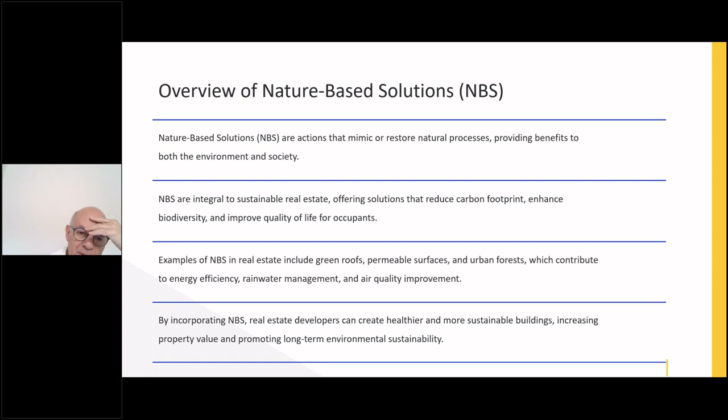Very typical examples of nature-based solutions are green roofs, permeable surfaces, urban forests, and trying to maintain and create conditions for more energy efficiency, rainwater management, and air quality. So when we incorporate nature-based solutions, real estate developers create a healthier and more sustainable building, not just increasing property value, but promoting long-term environmental sustainability.

So let's see how these two things relate together: the EU taxonomy on one side, the nature-based solutions on the other.

Basically, the criteria for EU taxonomy specifically requires some nature-based solutions to qualify as sustainable. Alignment ensures nature-based solutions meet standardized green criteria, and guidelines help developers implement those nature-based solutions effectively.

On the other side, nature-based solutions in real estate refer to green infrastructure and practices that mimic natural processes. The idea is to promote biodiversity, climate resilience, and community well-being. So nature-based solutions integrate project sustainability and long-term value.

And that's the benefits we can see in nature-based solutions in real estate. Basically there are environmental benefits, social benefits, and economic benefits. The environmental benefits include biodiversity, reduced urban heat island effect, and improved air quality.

On social, it encompasses community engagement, health and well-being promotion, and of course aesthetic enhancement of real estate projects. Economic benefits feature cost savings in maintenance, increased property value, and long-term sustainability.

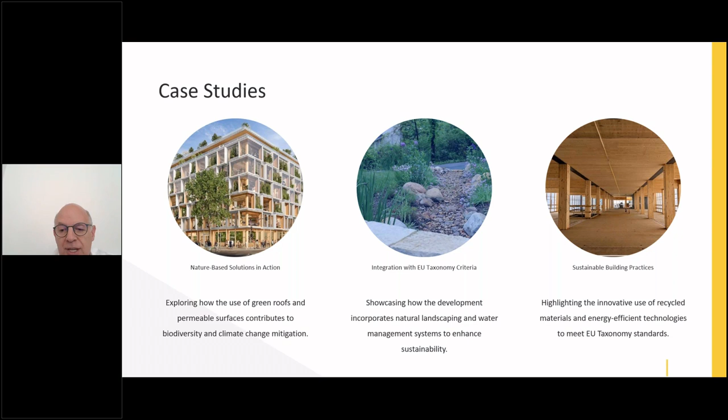So one of the things we are going to explore is green roofs. We're already doing that in Porto. Several projects already have implemented green roofs, and then we try to incorporate natural landscaping and water management. And the big focus in our company at the moment is the innovative use of recycled materials and new construction materials.

Let's talk about something not very used yet in the property development industry, which is bio-based materials. We are going to speak about these bio-based materials that slowly but surely we are going to increase the use of, to reduce the carbon footprint in our buildings. The main challenge I mentioned before is to have the certification level that we can implement this at a wider scale. But I'm sure everybody understands that lots of effort is being done right now to make sure these new materials have the certification required to generalize and intensify their use.

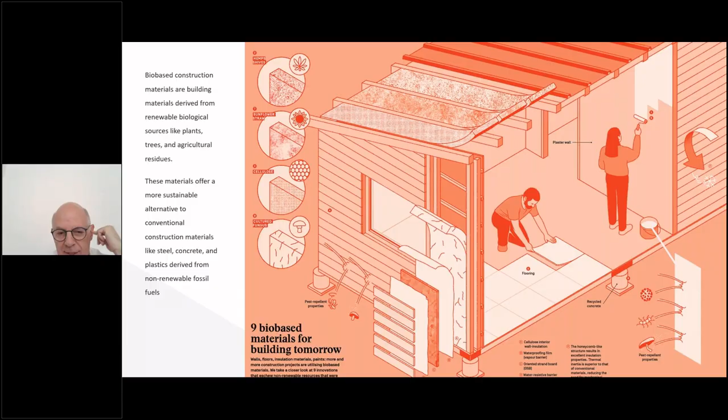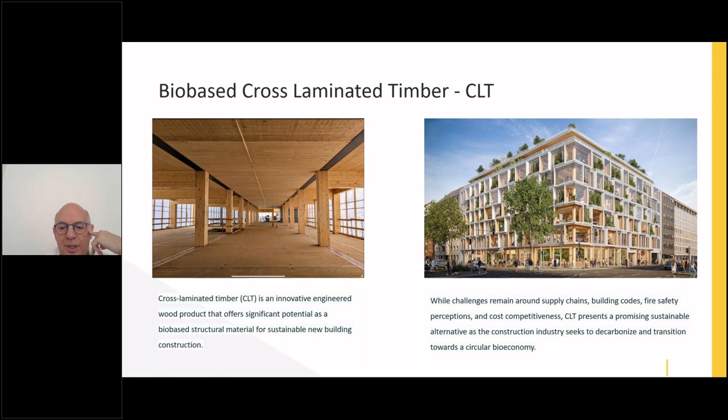The first and most important and most known is cross-laminated timber. CLT is an engineering wood product widely used for structural components of buildings, and this is a very big change in real estate development recently. We are seeing new CLT factories pop up all over Europe. Lots of countries now have their first factories to create this structural and construction material locally, to avoid large carbon footprints from transportation. This is one of the most promising materials.

One of the most innovative materials is coming from old age but with new techniques to use, which is straw. Straw panels and straw insulation panels for facades are seeing lots of new uses and applications, and they have very good behavior on the carbon footprint they capture. So it's a very promising biomaterial.

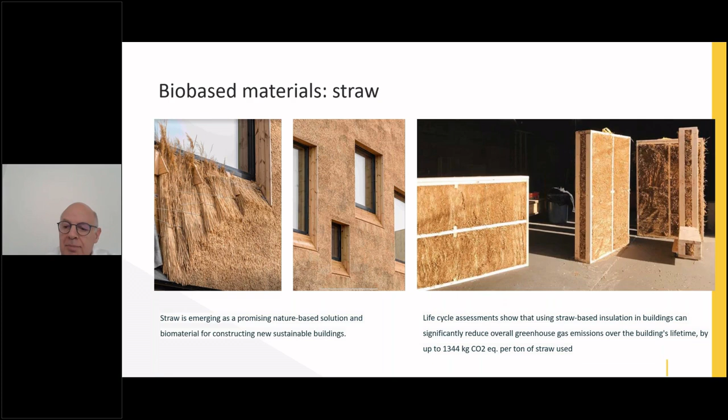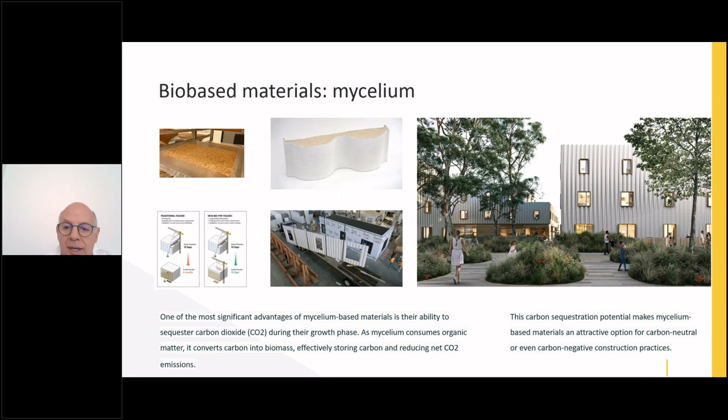The other one, which is very interesting, is mycelium. Mycelium is an amazing natural material that, with the proper technology, can create similar products to what we've seen until today with petrol-based plastic polymers. We can replace these petrol-based polymers with mycelium, with lots of advantages, becoming a natural material as opposed to the other.

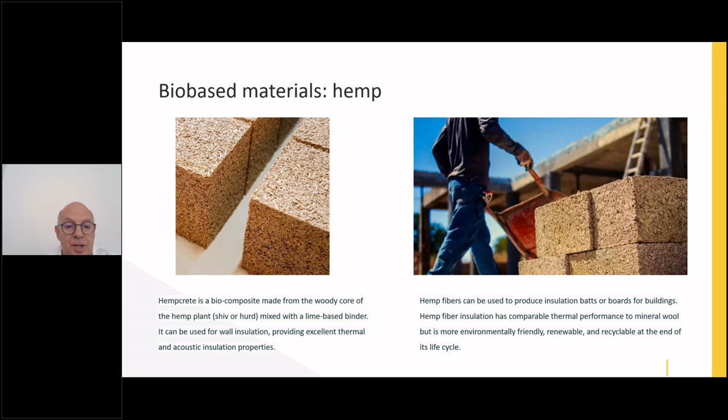Hemp is already being incorporated in a lot of construction insulation materials, and in Portugal we already have at least 2 factories organizing and providing it for construction. So it's something that is already being incorporated. Again, the issue is certification, which is very limited at the moment, but we hope to increase this very fast so it can become more used.

The other important part of these nature-based solutions is to try to complement and implement natural sources of energy. Photovoltaic panel use is already very widespread, especially in Spain and Portugal, where we have a very successful sustainable energy strategy at the national level. Solar photovoltaic has a natural limitation, which is the solar hours, so we are intensively studying the possibility to complement it with new generation urban wind turbines.

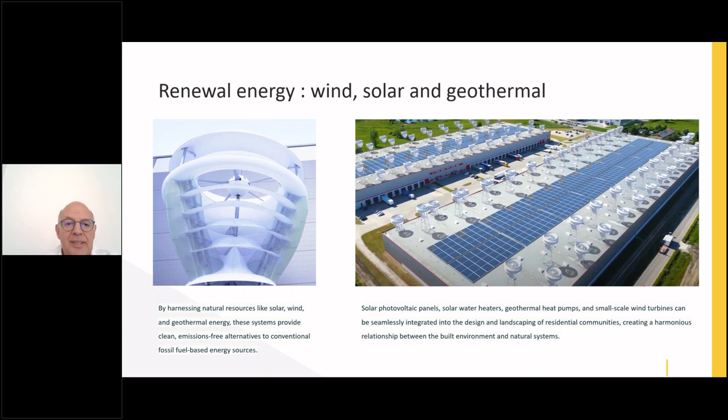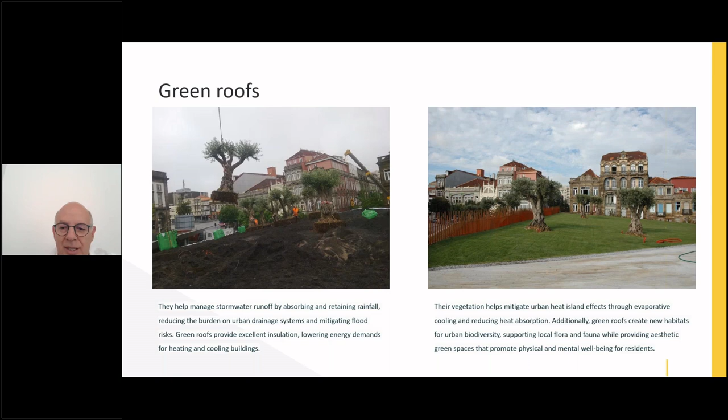Another important thing, shown in an example of a project we've done in Porto, is the use of green roofs—in this case with olive trees on the roof garden. It's a very successful square in downtown Porto, and I'm pleased to say the 50 olive trees put there 12 years ago are in very good shape, continuing to provide a qualified nature space in the middle of the city.

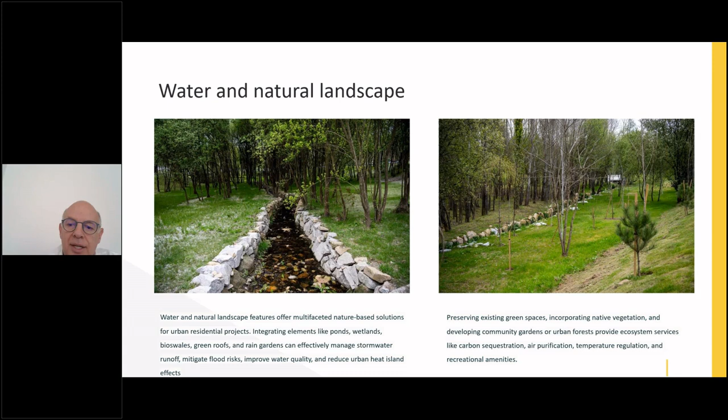Another important strategy is water and natural landscape, especially considering the extreme climate events we're going to face in Portugal more and more. We need a water strategy for the cities and for each development plot, improving the soil's capacity so infiltration of water to the subsoil can happen regularly. So when there's lots of rain, the water can go to the subsoil as much as possible. Water and natural landscape are very important parts of the green, nature-based solutions strategy we are implementing in our projects.

So just to wrap up, I want to identify the main challenges and barriers we're facing: limited awareness and understanding of nature-based solutions among real estate developers and investors, and maybe higher initial cost for implementing them. We have to do proper impact analysis on the financial side so everyone understands that even if it's apparently more costly up front, when we reach the carbon tax environment, we'll be in a much better, more financially sustainable position.

It is sooner or later we are going to have that. So the point is, the challenge is always a new thing in measuring how effective nature-based solutions are when they meet this European Union taxonomy criteria. We still have some standards and certification issues that are not fully implemented.

Levels is very recent, it's not generalized yet. Levels is the European Union approach to the EU taxonomy that allows us to identify the steps we need to take to make sure our developments conform with this criteria. But everything is very new, and not lots of people know how to deal with that. So it's the education challenge.

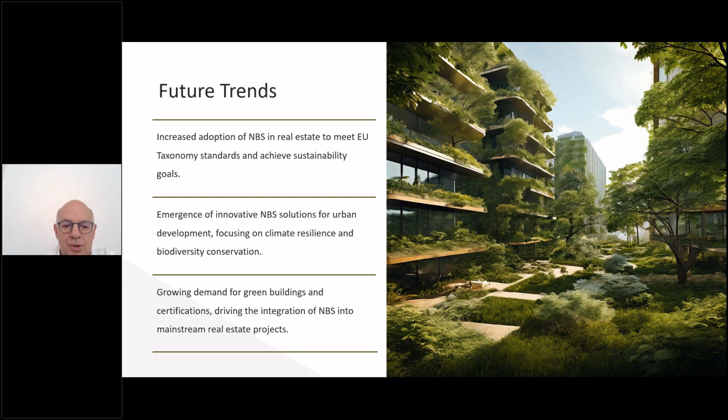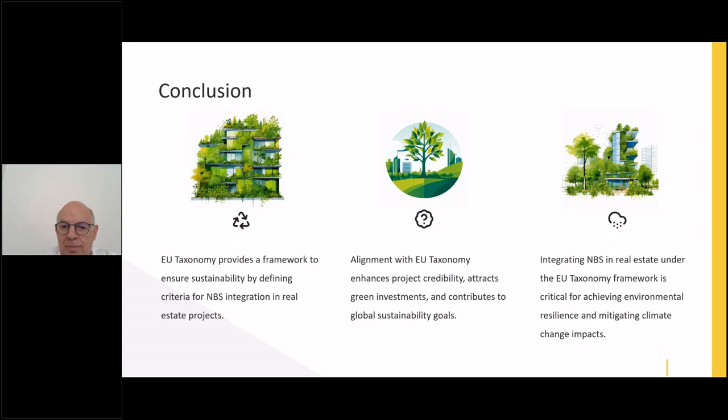So in conclusion, EU taxonomy provides a framework to ensure sustainability by defining criteria for nature-based solutions integration in real estate projects. Alignment with EU taxonomy enhances project credibility, attracts green investments, and contributes to global sustainability goals. Integrating nature-based solutions in real estate under the EU taxonomy framework is critical for achieving environmental resilience and mitigating climate change impacts. Thank you very much for your attention, I hope it was an interesting subject for you.

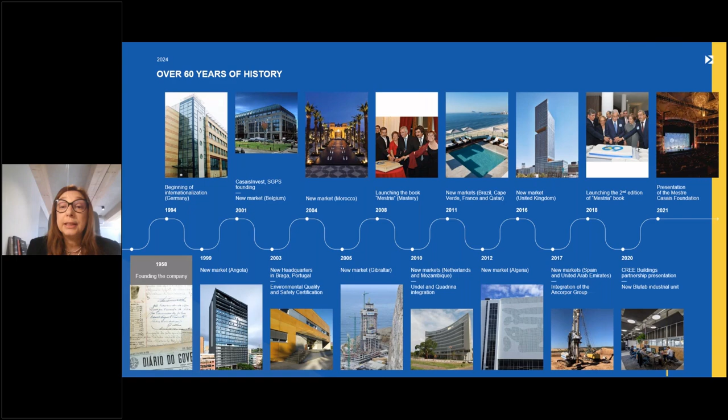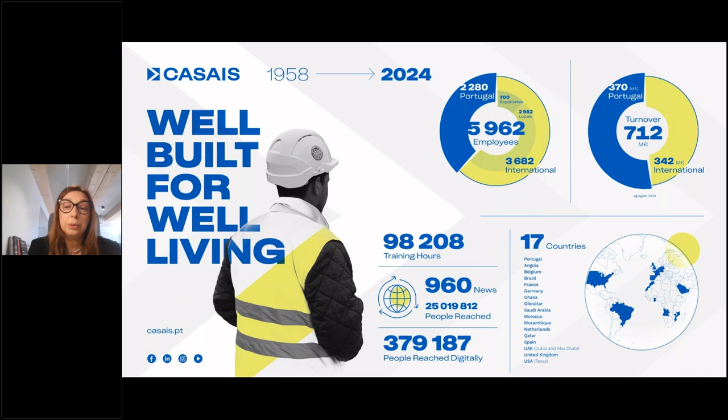For us, real estate is now, but we have been working in construction for over 60 years. We started in Portugal, and we are now present in 17 markets. We have one thing that makes us very proud: 98,000 training hours. We believe that people are the future of the transition in construction. We are almost 6,000 employees worldwide, and we have a turnover of 712 million euros, the majority made in Portugal, but a big percentage made abroad.

We have 3 business areas: engineering and construction, trades and industry, and real estate and asset management, which allows us to have a very holistic vision of construction as we are present in all of them. So the transformation in construction in this small video that you are seeing right now is our holistic vision of it.

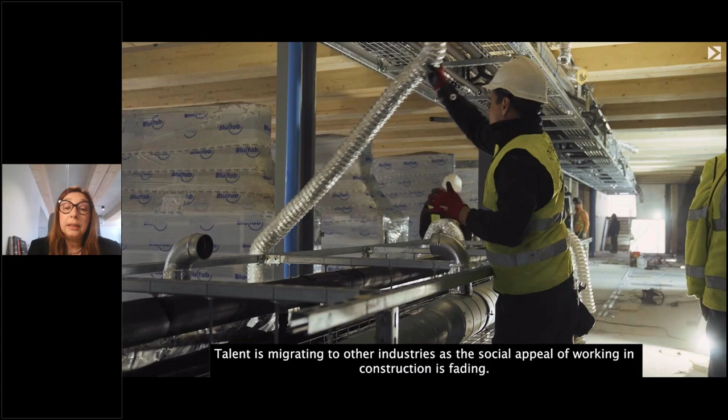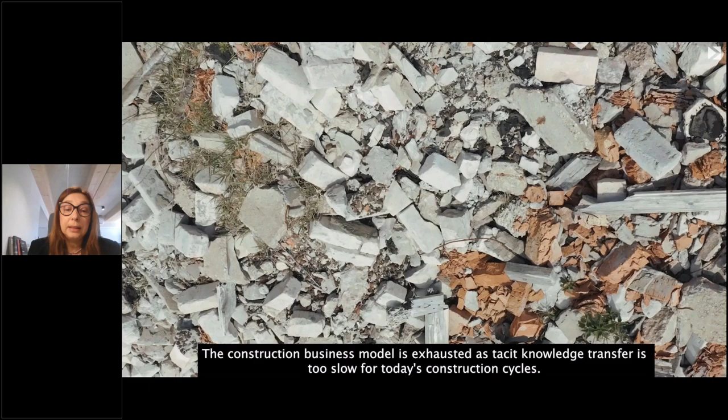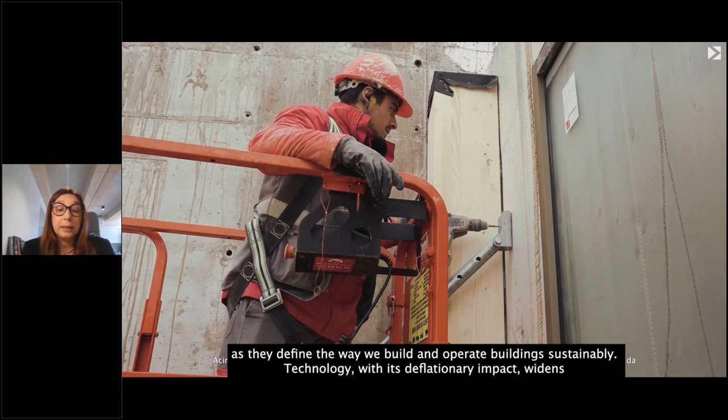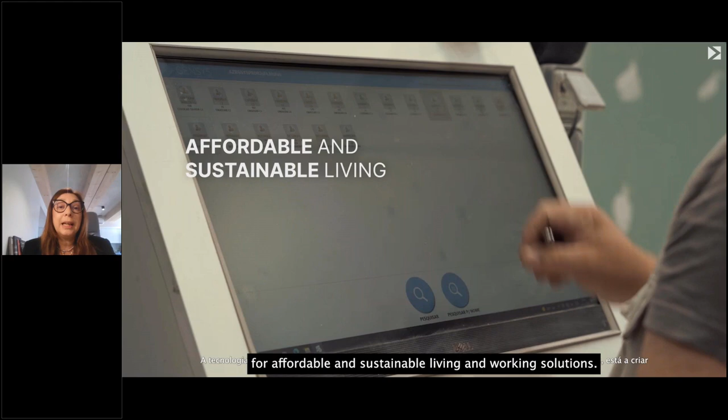We know that economy and society are changing, and migration in the industry - the construction industry appeal is not a big one. So we have to do something to attract talent and to make construction have less impact on climate change and the environment. So we need new ways of building, new technologies, and new ways of thinking, to decrease the gap between the need and the capacity of the sector to meet it.

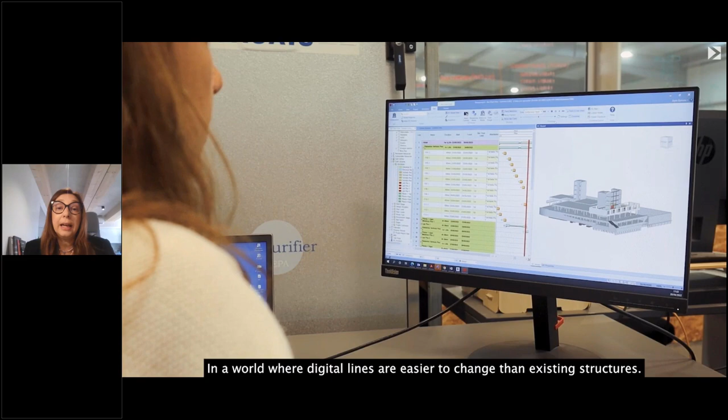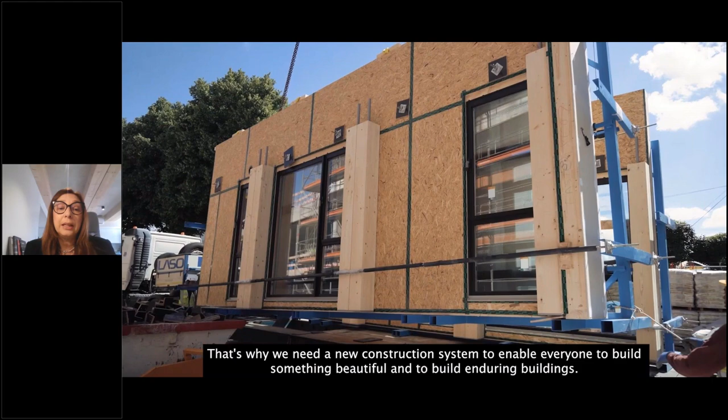We can do that, but we need to be attractive to the people that live in buildings and spaces. So design takes a very big part of it, and we can do it by partnering and developing ourselves with others, seeing what aesthetics and design do to break prejudice and foster the integration of people. This is something we treasure and are doing right now in new systems of building that allow creativity and allow us to retain talent.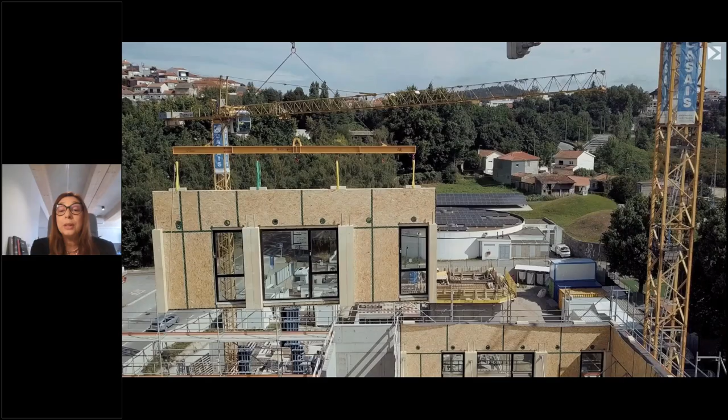What we aspire is to create an ecosystem between design and product design so that we can build faster, more comfortable and cleaner buildings. We are integrators, we industrialize, we productize, and of course we collaborate a lot to educate the sector towards a more sustainable way of building.

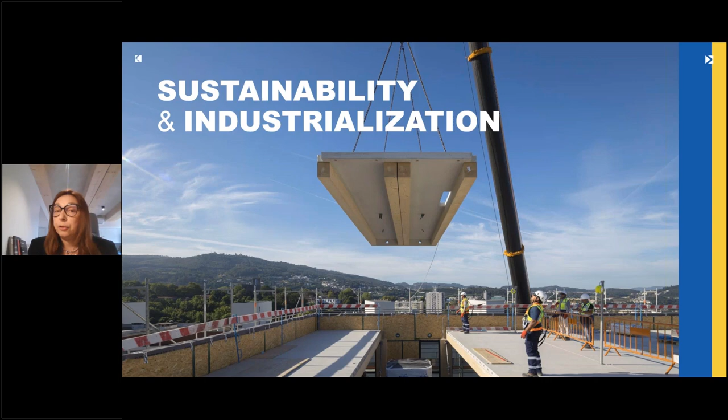For that, we invest a lot in our people. For us, this is a cultural revolution and something we all in construction should do. Sustainability for us is closely related to industrialization. We have three strategic key points: digitalization, industrialization, and of course sustainability, which comes combined with a series of factors, not only environmental but also social and governance.

For us, sustainability is a big part of our business and our way of working. We want to reduce the carbon footprint, decarbonize, but with a big focus on circular economy, and also on social vectors, on the well-being of people using the buildings. It's also very important to keep an eye on green finance and certifications, and of course our ESG commitment. We have our ESG report available online for you to check if you want.

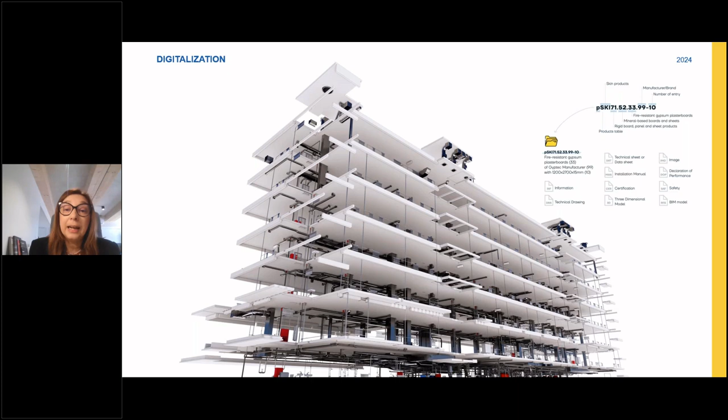Digitalization is a big part of this movement. We first do, in a collaborative approach with our partners, the digital product, so that we can then know exactly what the building is made of and how the pieces will fit when we go to construction on site.

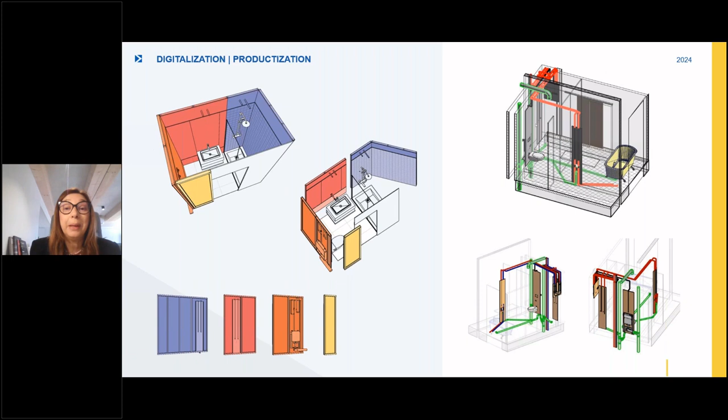From the digital building, we part it into several products. We go into productization and we make smaller parts, smaller Lego pieces if you want, that will fit all together according to the big drawing of the building. But first they go to a plant to be produced. What we have is kind of a box, a building turned into parts that will assemble together into the main product that we have, which is buildings.

With this, one of the big pluses we have is of course a more controlled quality, a better environment to work in, and a bigger inclusion of people that otherwise wouldn't work in construction. So we retain talent and attract talent that was actually not the first thing that came to our mind. We have a lot of women and a lot of elderly people working with us in the plants, teaching what they know to people that are starting, and that allows us to have very high product quality for the components we make.

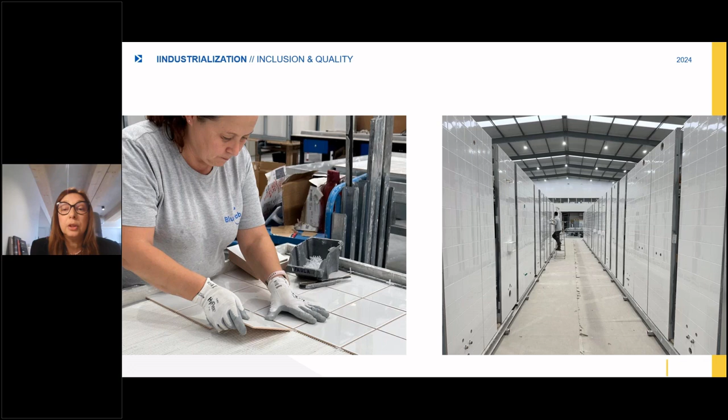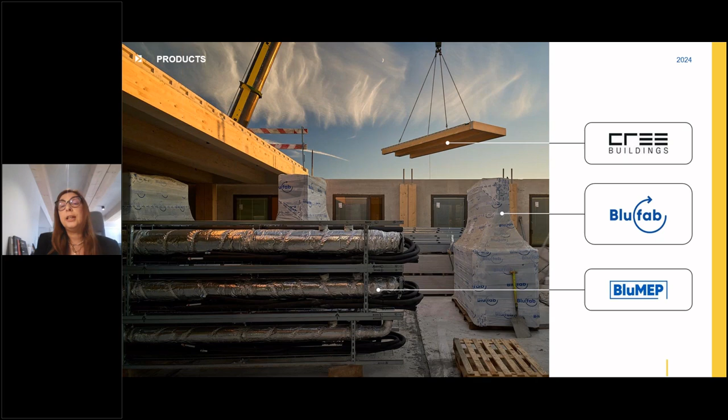We do that in several business areas. We are shareholders and the Portuguese partner for CREE Buildings. We have a plant in Portugal that is actually growing, that does partitions, interior partitions with all the MEP specialties, and we have BluMEP that does all the air conditioning and water networks.

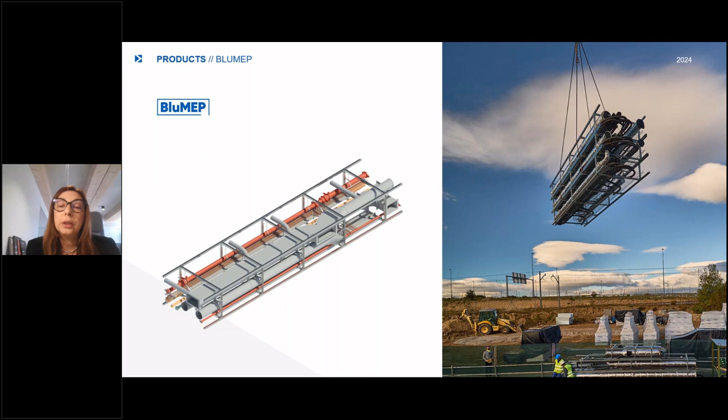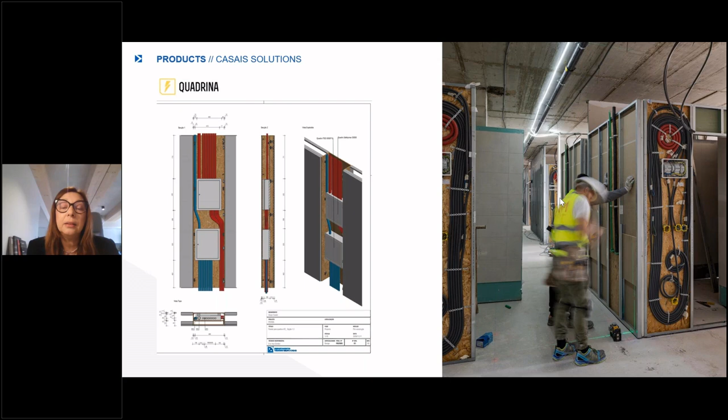This is a fire network that was built off-site and is going into a building. As you can see, here you have what the digital becomes in real life on a real construction site. We have electricals also. Our interior partitions are not just decorative partitions, they are functional partitions, with all the electrics and plumbing and technical parts needed.

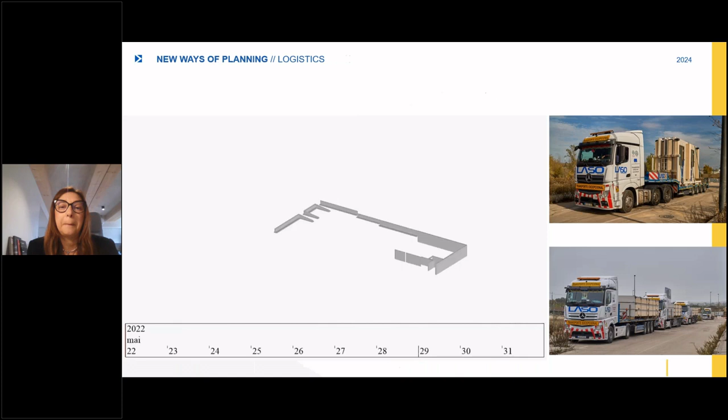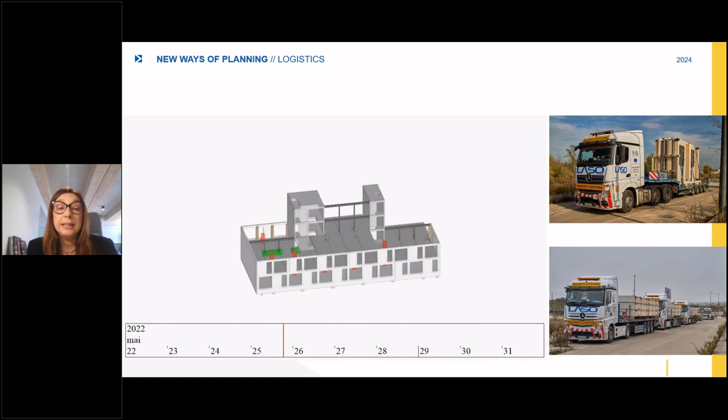What we do, with our BIM, is take a part of a building, in this case a bathroom, and divide it into small parts that can be produced on a plant, not on the construction site itself. For that, as we are transporting parts, we need very, very accurate logistics. We do a 4D planning done by the minute, which makes sure the trucks enter the construction site at the exact moment they need to unload, to build what you are seeing right now. This is an actual plan of the building you will see after.

This is real life, the first hybrid building of the Iberian Peninsula, made in Guimarães.

And this is the real life time lapse of what we are doing. It's a hotel and residential building, two buildings, the first part of the MITH that I will show you further on.

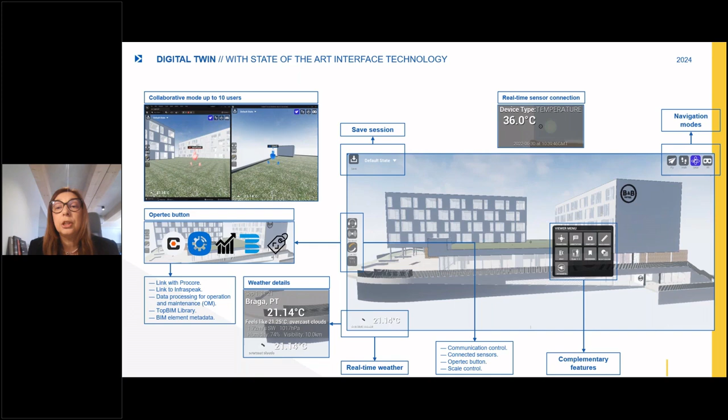Of course, with this digital twin, one of the things that is important when we do buildings is to maintain them and make sure they endure as much as possible in their right capacity. So the digital twin allows us to have a more accurate, more energy saving, water saving, resource saving management of the buildings. That's why, not only for construction but for building management, this is really, really important.

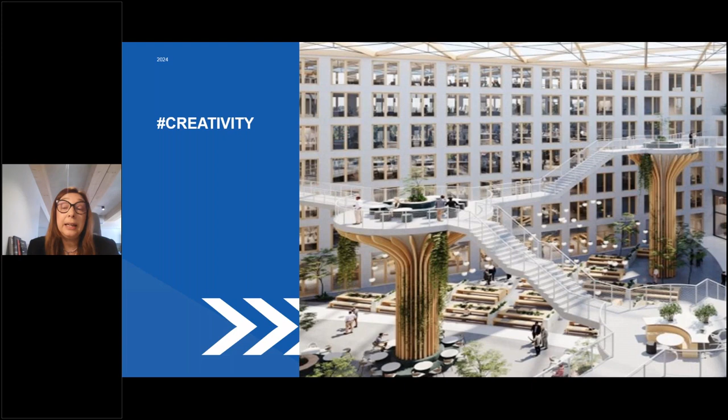We do all this, but our Lego parts, our products, are not a block, they don't block creativity. Like Lego, they allow us to be creative and to join the pieces in all sorts of ways.

Connectivity with the digital twin, with domotics, with everything that we can do to measure what is going on in the buildings, around the buildings, so that we can live better in the buildings. Well, living is a big part of sustainability. We need buildings that evolve according to our needs and that make us feel comfortable in living.

Of course, we don't have a lot of space, so we need to teach people how to live in small spaces. We have a partnership with IKEA Portugal, and we made a very small apartment, representative of the apartments that we have in MITH, that you will know in just a second. And in 36 square meters, you can live with a couple and a kid if you are able to decorate and have the interior made.

MITH is our real estate's very own promotion. It's in Guimarães, near Braga. It's Minho Innovation and Technology Hub, where we want to show that it's possible to have all these technologies combined together for more sustainable living spaces, where technology, work, and living all take part in the life of the ones that are there. Our scope is to make a strong partnership with Minho's University and all the technology companies around.

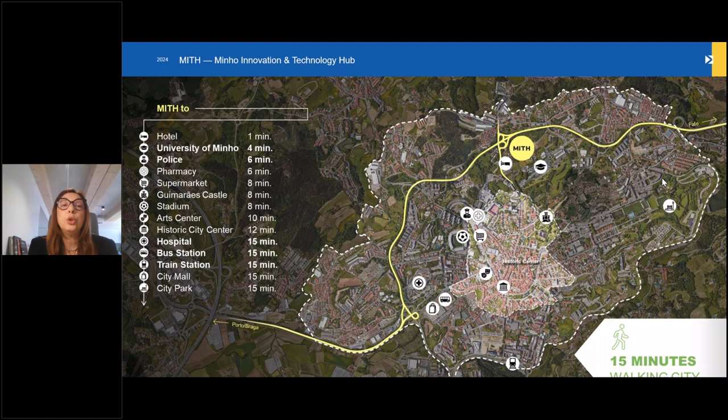So it's sustainable in every way. We are now in the first stage. We will have all these buildings that you see here in color. What we have now is the first part, which is a B&B hotel and first corporate residences and a co-living space, a co-working space down there.

So 44 studios, 95 bedrooms in a hotel and a co-living space. As you can see in the interior, this is a 40 square meter apartment that is completely furnished so that you can have all the comfort needed to live and to work without being stressed in your daily life, which is a big part of our holistic vision for construction.

We have a partnership with Situ that has this co-working space. So actually, in 5 minutes, you can be at your home, at a restaurant, or even working, without getting into your car.

This is our vision of the future of sustainability. We believe in it and we promote it in our own buildings, and we feel that that's the way construction should follow, so that we all can live better in the building space and, of course, build better, well built for well living. And now to you, Jordi, my part is done.

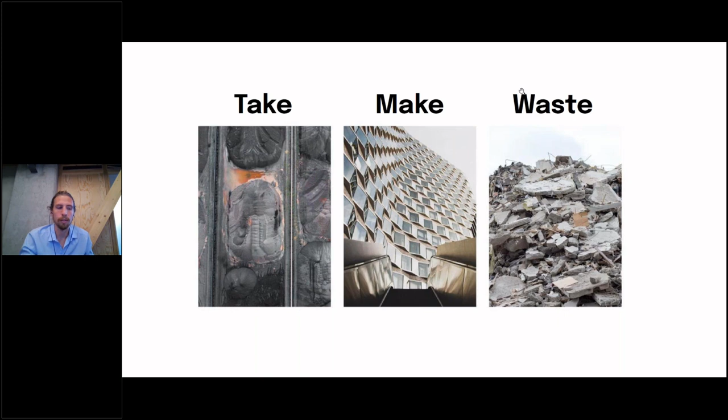That's, of course, not a lot, and the aim of the European Union is to have 50% of it until 2030. So there's a long way to go. What you can say is climate change is decided on the construction side. So we have to have a completely different look at materials in existing buildings, look at them as a source for new products and new buildings, and as urban mines.

And we from Concular, we started this journey already 12 years ago. The idea was, from one of our co-founders, that on one side there are materials left from deconstruction, on the other side there are new construction projects where these materials are needed, so let's connect them with a marketplace. This is where the idea of Restado was born. We built that into the largest marketplace for reclaimed materials in Europe.

However, what we saw is that especially private people are using that, and that's of course great. But if you really look at which projects have the biggest impact in terms of CO2, it's the large projects, it's the professional actors, and they were not on board. They didn't use the marketplace.

So what we did was we tried to understand why they are not using it, and then we understood they're not using it because they have different challenges. They want to have a specific amount of materials at a specific location at a specific time with a warranty, and this is something a marketplace cannot fulfill. So that's why we had to go also into the processes before and after such a matching to really ensure the quality, the amount, and so on.

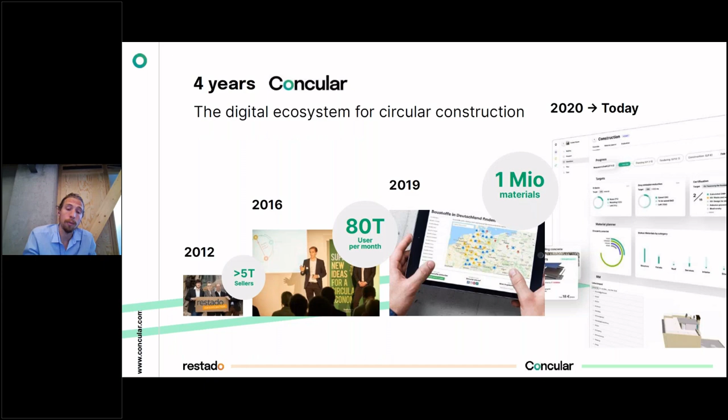This is where the idea of Concular was created more than 4 years ago, where we say we digitize, analyze, and optimize. So we are around 65 people in 6 offices, and we work with the largest building owners, public and private, in Germany.

What's very important is to not do that alone, but to have a good network of companies working together. This is why we have this circularity partner program where we work with the largest manufacturers, project developers, construction companies, architect offices and so on. So they're all working together on this complete vision.

The big challenge, or the big first step, is to digitize materials, because right now we just don't know what's in a building. For new buildings, we can do that quite easily with a BIM model, which we can upload to our platform. But the challenge lies in the fact that in Germany alone, 20,000 buildings are getting deconstructed every year, and right now, no one looks at these buildings and how these materials can basically be reused.

So we have to digitize these materials. And if we know what's in a building, we can analyze how much embodied carbon is in it and how we can bring these materials back into the circle. If we know that, we can take out materials and put them into other buildings or back to the manufacturers to really close the material loop. For the digitization, for a new building, we can just create material passports.

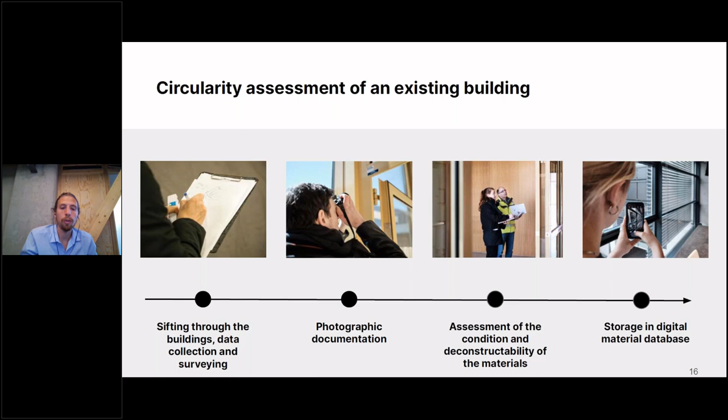That's quite easy and possible on our platform, but for existing buildings, we also developed software with which you can go through the building. It's very easy - 10,000 square meters takes just 2 days. You can also use technologies such as 3D scans, where we can scan the room, and then with a computer vision algorithm, already tell what's inside.

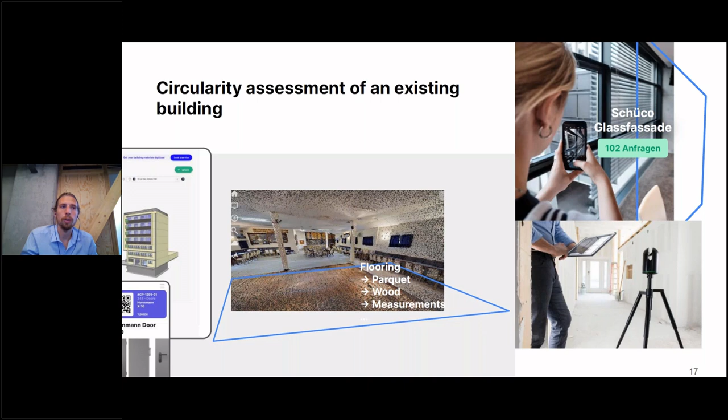This methodology was already applied to more than 400 buildings in Germany, and this is why we created a standard for that. It's called DIN SPEC 91484, where we standardize this procedure of recording building materials to evaluate what to do with these materials after their life, in a high-value way of course. That is right now adopted all over Germany and should be the standard for so-called pre-demolition audits.

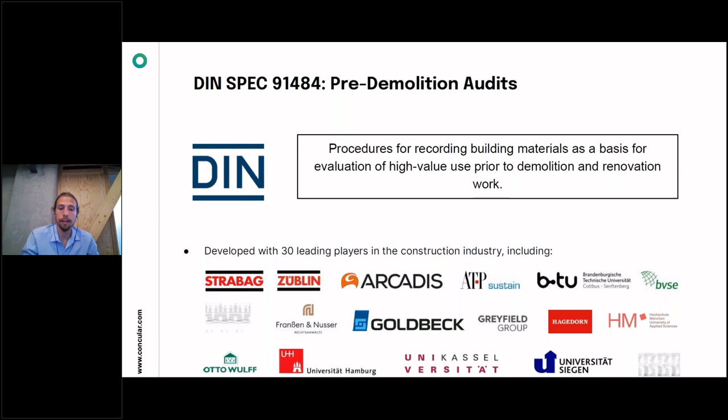So now we were able to know what's in a building. The next step would be to analyze what does that mean. And there's different methods for that.

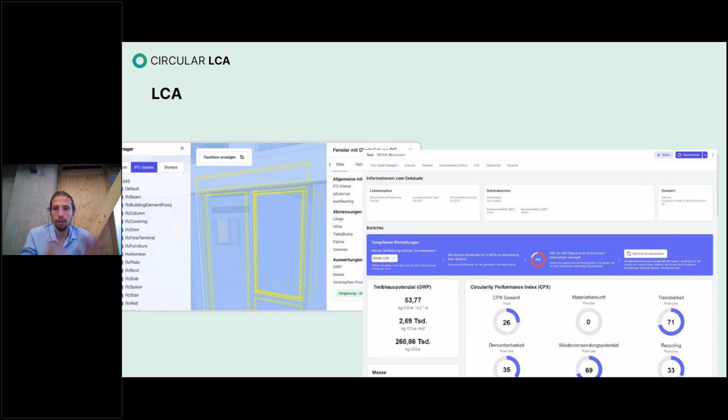Of course, an LCA is a life cycle assessment to know how much is the embodied carbon in the building. So if you have an existing building, you know how much CO2 can you save, but also for a new building, you can see do you fulfill the requirements of this new building. And if not, you can optimize, for example, by using reclaimed materials.

We also can calculate the circularity performance index. It's an index which is telling you on a component, but also a building level, how circular basically your material is, but then also your whole building. And it has 5 factors. First, the origin, so is it a secondary or primary material. Then how easy is it deconstructible, how easy it's separable, how easy it is reusable, and how easy it's recyclable.

So for example, for a window which is 10 years old, we can say its origin is new material, but it might be quite easy to deconstruct, and it might be quite easy to separate, but it might not be very easy to reuse because it's so old that it cannot fulfill the energy requirements anymore. But it has a recyclability which, based on the window and material, could be quite high.

And taking all this together, you get a score between 0 and 100. The idea here is really that you are able to decide, especially for new buildings, how circular the new building is, and in the future there will be regulations saying you have to have at least this amount of circularity in your building.

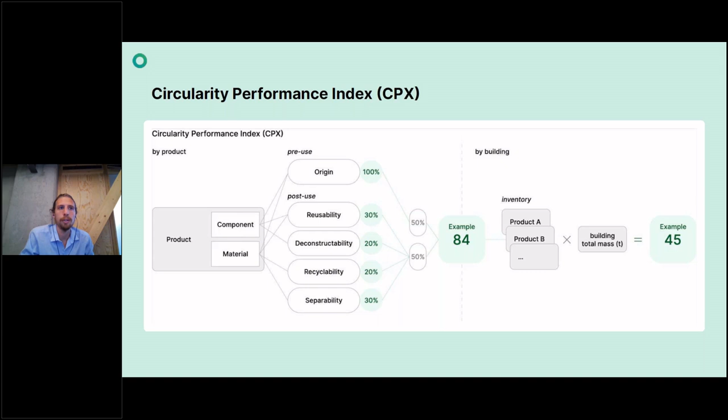Now, having all that measures, you can optimize. Meaning that for a new building, you can install our software in the architectural planning software. And with that, you are able to measure how much is the LCA, how much is the circularity, and you can not only measure that, but you can click on optimize, and then we do some recommendations. For example, use a reclaimed window instead of a new window, and so on.

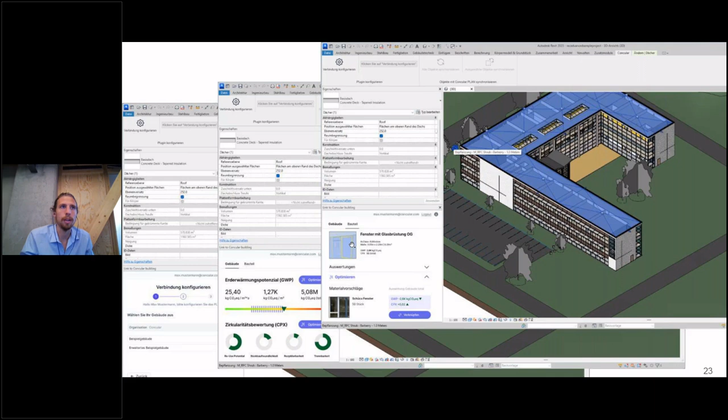And with that, of course, improve circularity of the building. But you can also, if there's a deconstruction, sell these materials, and we also do that. So we did more than 450 buildings already. These are all kinds of buildings, from an office building to residential building, swimming pool.

Now for the European Championship, the stadiums which were refurbished, we were able to take a lot of materials going out into the new buildings and so on. And so you can find it all on our shop, but we work a lot with the architecture office, project developer, building owners to get these materials.

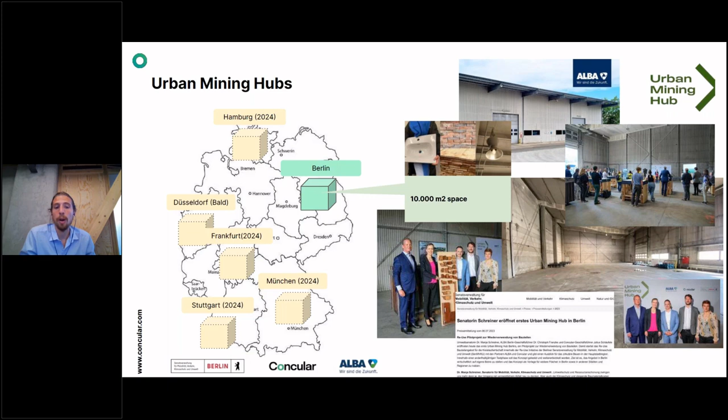A challenge they have sometimes is there's a deconstruction on one side, and then it's 3 months or more that you need the materials. So what to do in between? For that, we created the concept of so-called urban mining hubs, which are basically a storage facility where you can refurbish the materials, you can store the materials, and so on. We started a year ago the first urban mining hub in Berlin, which is very successful, and we will roll out this concept now in every large city in Germany.

Another challenge is insurance. Companies came to us saying, I want to reuse these materials, however, do I get the same warranty for that? And the answer is yes, because by law in Germany, and I think it's very similar in other countries, you anyway have to give a warranty. However...

The big challenge is, of course, that companies like Concular are not existing anymore, maybe in a couple of years. That is the same risk for a manufacturer. However, the perceived risk, and I think this is very interesting, is much higher for reclaimed materials than new materials, although it's not true. So there's a higher perceived risk also in terms of warranty, but legally looked at, there is no real difference in terms of the risk.

Because such companies came to us, we worked together with the largest insurance company in Germany, and created an insurance only for reclaimed construction materials. With that, you can now insure materials and get them back into a second life. If you have any problem with the material, you can go to this insurance company, which already exists for 150 years, is the largest in Germany, and will exist for the next 150 years. So now you get reclaimed material with better insurance than new material, which is great, because we can be better, so we can be cheaper.

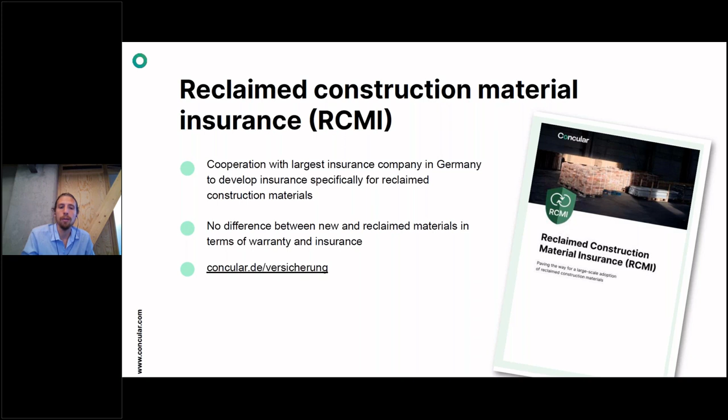Normally these materials are around 20 to 30% cheaper than new materials. They are faster, so a third of the production time, because it's already produced, and you get a better warranty on that. So we're not going in the direction of creating parity with new materials, but having reclaimed materials that are even better than new materials. With that, we've sold more than 10 million materials.

I want to give you some examples of that. Two projects I brought with me. One is this really great building in Düsseldorf, the former Vodafone headquarters. It will not be torn down, but the interior will be changed, because it's now owned by the state, and administrative offices will go in. So what we did was go into this building with our software.

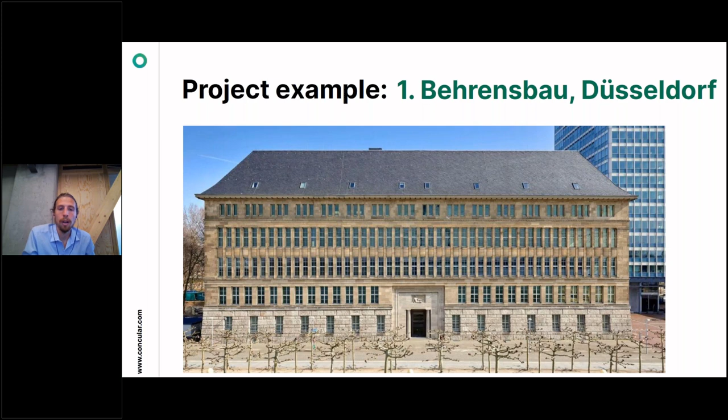We digitized the whole building in just 2 days, 20,000 square meters. And then we found a lot of interesting materials like kitchens, partition walls, raised floors, flooring, lighting, whatever is in such a building.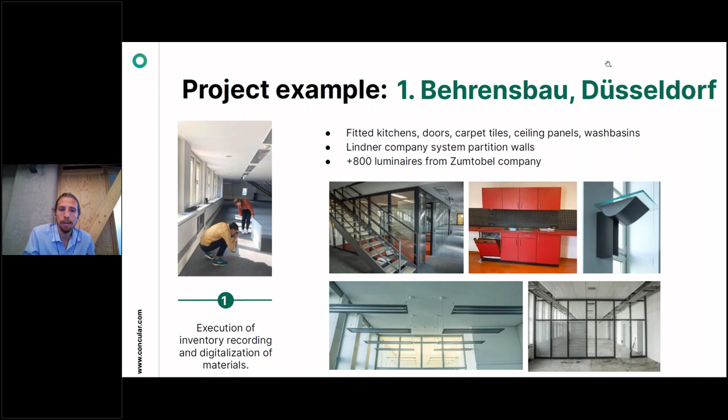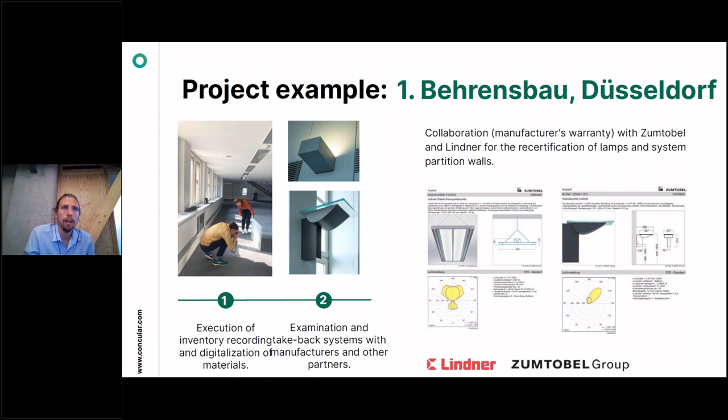Then we went to the manufacturers and I told them, you always say when you sell new materials that these are the best materials with the highest durability. So if you say it's the best material, will you also be able to take these materials back? And the answer was yes. So the manufacturers really created a take-back system, and with them we were already able to get conformity agreements and so on. And with that we sold these materials on our platform to our clients, and were able to really get these materials back.

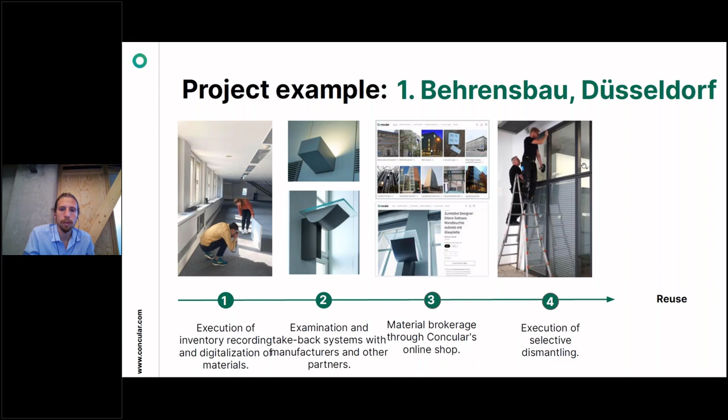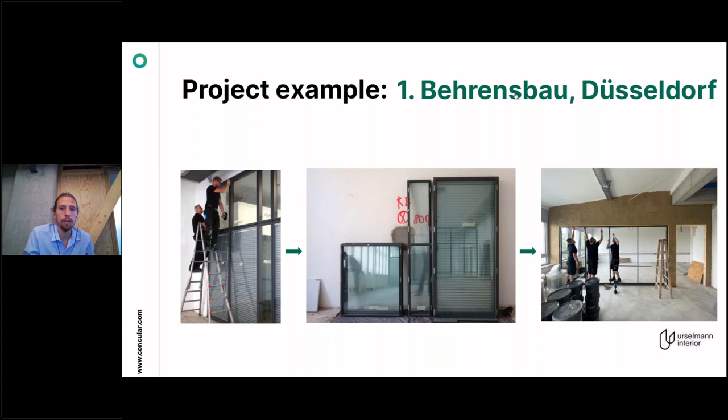Here you can see, for example, how the partition walls were deconstructed, refurbished, and put into another building. That was done with hundreds of meters of partition walls. You can see the kitchen which went out, and also a door, and so on.

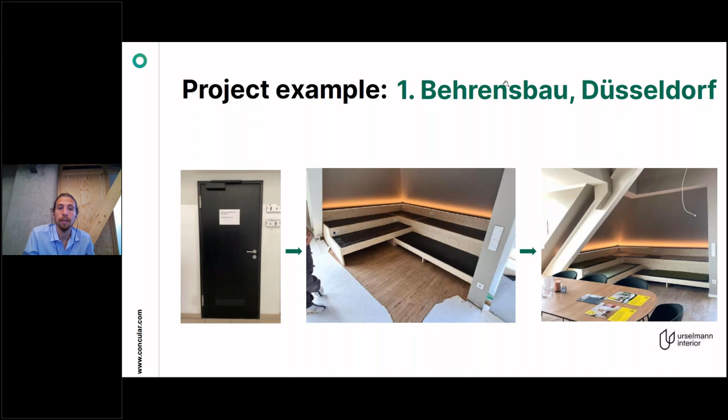The result was that we were able to get 70% of the materials back into a second life, compared to normally 1%. We saved around 35% of the CO2 that was in the building. We made 160,000 euros revenue and saved 600,000 euros of landfilling costs. So if you put that all together, it's around 1 million euros of taxpayer money saved, which is really great. Circular construction is not more expensive, you can make money with that. I think this is really interesting for the real estate sector, because in the end it's about money. If you can combine circular construction with financial and ecological benefit, I think this is really great.

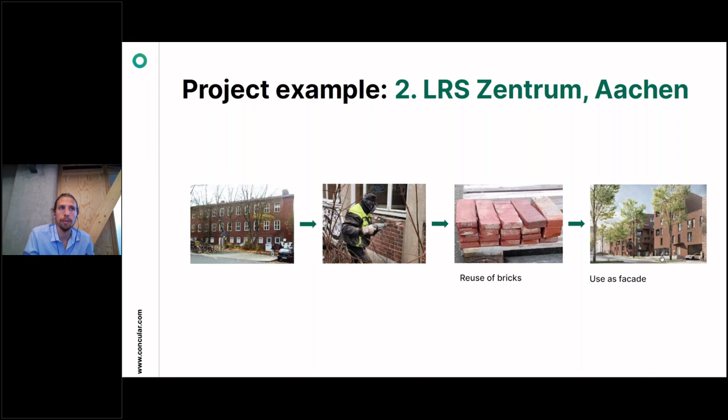A second and last example - actually I brought 2 more examples. The second example is the school in Aachen, where there were 10,000 bricks. What we did was go to the school, take out the bricks, they were cut, and then put on the new building, which were residential buildings, saving a lot of CO2 and around 20% of the cost.

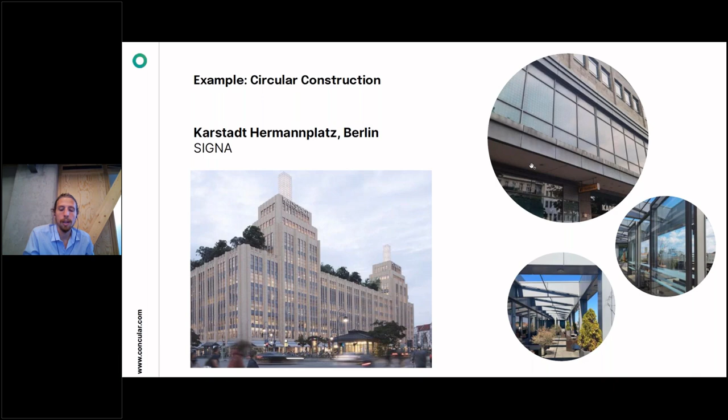Another project that's also already in competition is the Karstadt Hermannplatz, the big department store. The idea was to refurbish the whole building. What we did was go in, digitize all the materials, and then a competition for architects was created, where they had access to all these materials, and their refurbishment of the building had to be done using materials already in the building. Because we gave them all the information about the materials, they were able to create this draft for the competition, and in the end the architecture office that used the most materials won, which is a Danish architecture office.

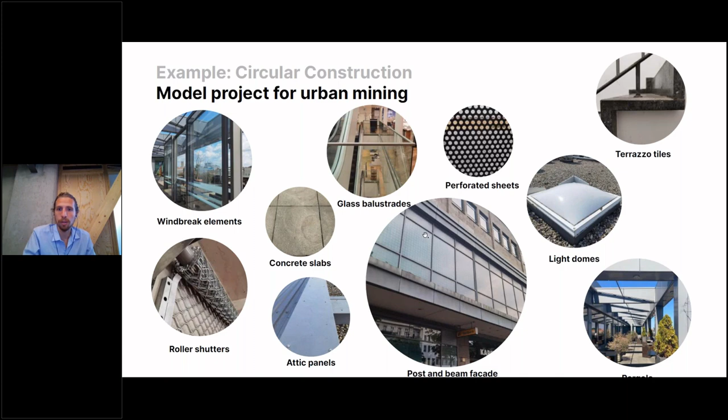And these are just 3 of the 400 projects we did in the last 4 years, and we are going step by step, trying to always go one step further to really make circular construction being construction. We don't want there to be construction and circular construction separately, but construction being by default circular construction. That's why we're here from Concular, but we also believe we can only do this together. This is why our motto is together we are circular. And with that, thank you.